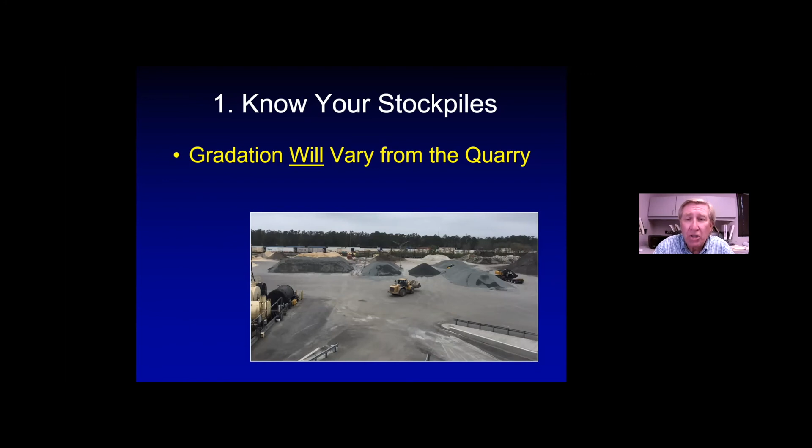If there's any upset conditions at the quarry or at the transfer station - we bring a lot of the aggregates in Florida by rail because we're basically out of stone in the state - so you've got a transfer point at a rail terminal, you've got a transfer point with trucks bringing it into your yard. And the point here is that things can happen, and the caveat here is that gradations will vary. Okay, so they are going to change. The question is, how much do they really do that?

So checking your gradations as they come into your yard is an excellent best practice. Most people will check this anywhere from 1 to 5,000 tons. I'm a big proponent for checking every 1,000 tons of material that comes into the yard and knowing what those gradations are. If you look at this little blackboard here, this is actually a diagram of the stockpiles in the yard, and you'll notice some key numbers on these screens and little diagrams of the date the material came in and what the percent passing was.

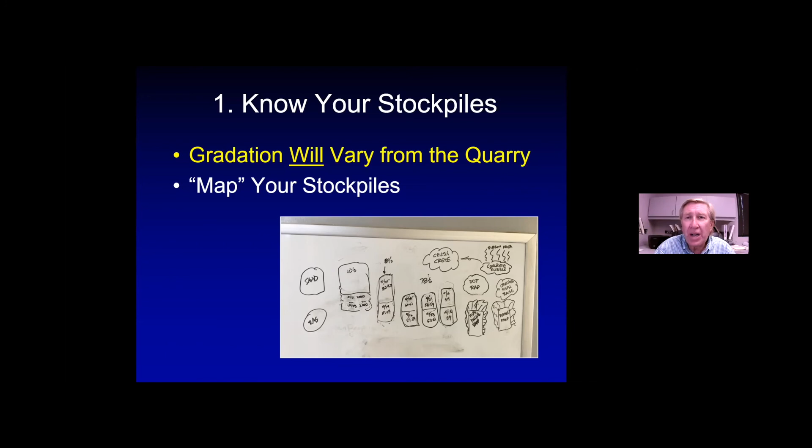This plant uses percent passing in the control sieve for those individual stockpiles. The point is that producers that have success know what's in those stockpiles before they put them into the plant. And because we're testing on that, your first in, first out inventory method is better than your last in, first out approach.

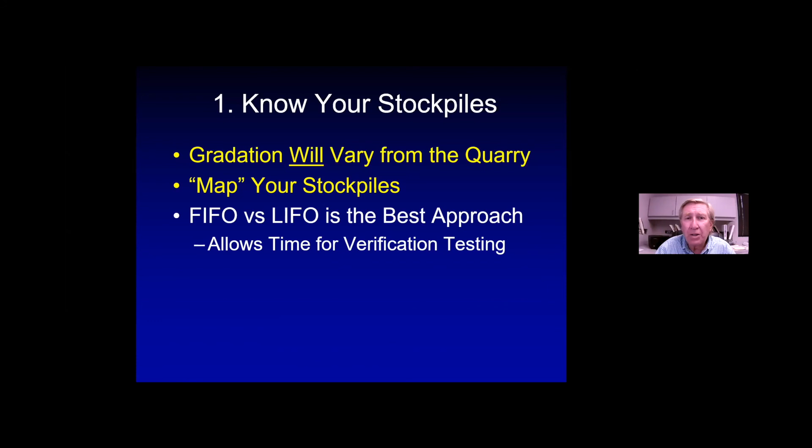Last in, first out is really easy: throw the rock in the front of the pile and feed it into the plant. First in, first out allows you to check your new material and still use your older material in your plant process, so you're always staying on top of that.

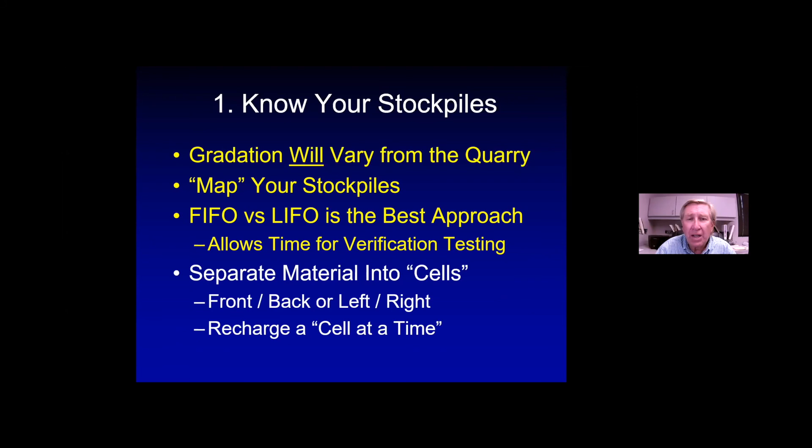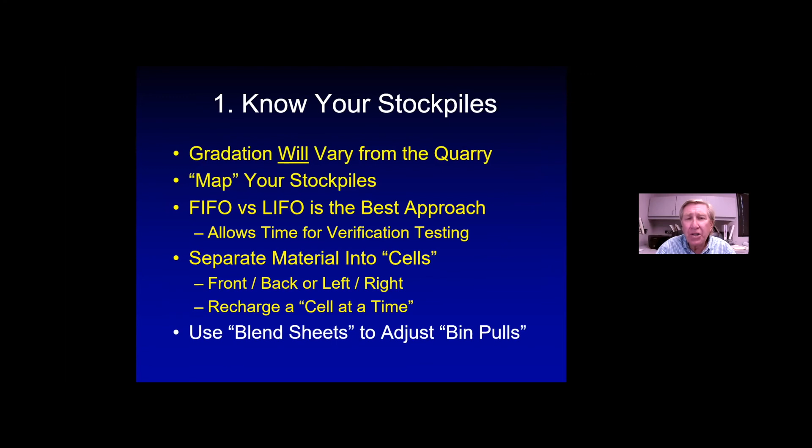And if there is a change, you can use blend sheets to adjust your bin pulls at the plant. The question becomes: are you going to do that proactively, or reactively? You can do this proactively if you see a large adjustment.

You use these blend sheets to create your job mix formula, your bin pulls, or your percentages to run your plant based on average gradations. So you'll come to a day when you look at this and say, wow, the material's really fined up, it's really coarsed up, we're out of the other material. Maybe we'll make a proactive change.

The difference between producers that are totally on top of their game, always ringing the bell with a bonus or never having any problems, is that they've embraced this proactive concept, and you'll see that throughout this presentation. Again, these aren't necessarily our ideas; this is what we see working with companies that have great success.

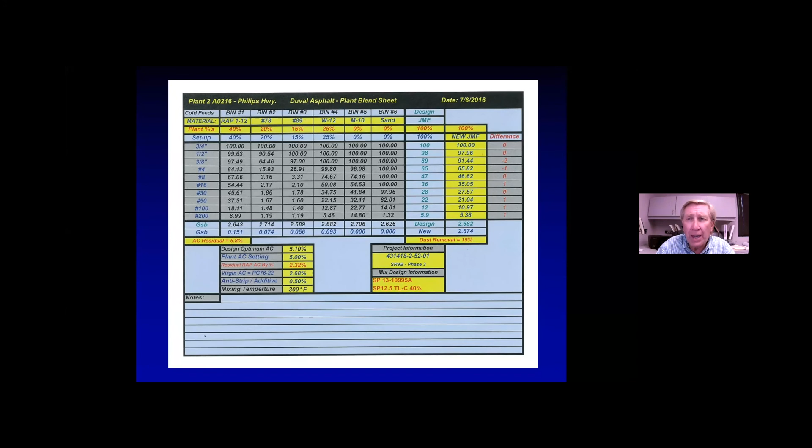They know what's in the pile. They're making a decision proactively on whether they're going to make a change or not. They're not going to wait for the mix to go bad. For that reason, they also go and check their plant calibrations, because calibrations do shift, and the plants are not going to be perfect.

It's about routinely checking plant calibrations, which is not the same as changing them. Checking is not changing - that's a key point. It lets you know your calibration has not shifted. Usually this is a mechanical or electrical problem that caused this to be the case. One common problem is a plugged feeder - the guys open the gate to remove the obstruction, and they'll accidentally put the gate not back in exactly the same position.

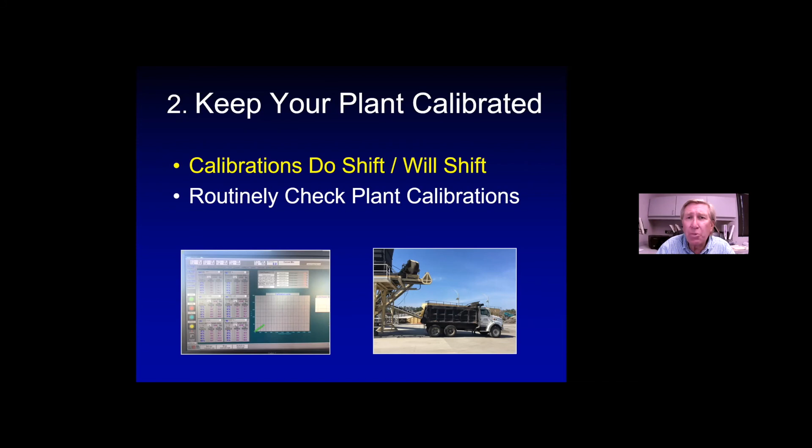This happens a lot, and it changes your calibration and will affect the final mix. So checking your calibrations proactively is what people do that have great success, rather than waiting until the mix just goes bad.

Electrical and mechanical problems are usually at fault here, not necessarily a human problem. It only takes 30 or 45 minutes per test. A lot of guys will check those calibrations at the end of the day when they're on hold - they'll check a feeder, check a belt scale, or check an asphalt meter.

It's important, if you find a shift, that you don't make a change without contacting the quality control department, because they may have adjusted the bin pulls to make up for a calibration error they didn't know existed in the plant. So when you find a calibration shift, you want to work with QC and say, look, this is what I've found.

It's going to be a little coarser, a little finer than we anticipate. What do you want us to do here? And then everybody's working as a team.

Teamwork is something that is going to be woven through my presentation and Steve's presentation. This should be another bullet point, because people that have great success have developed a good teamwork protocol inside their organization.

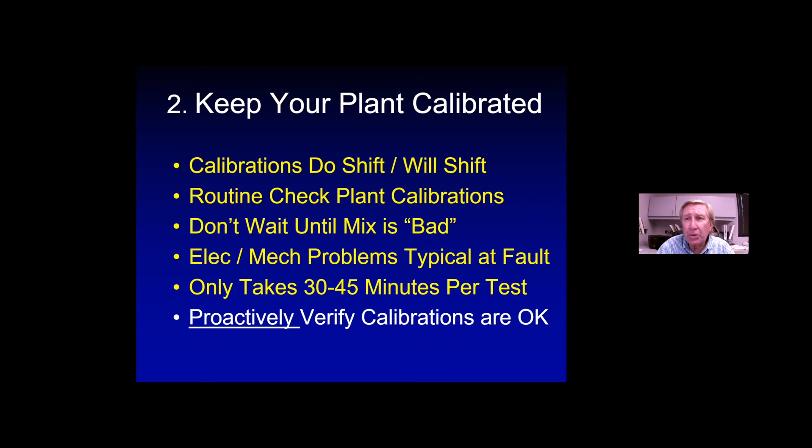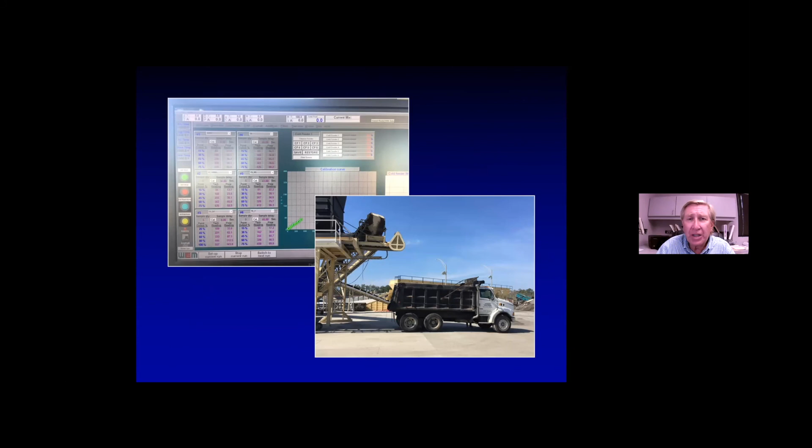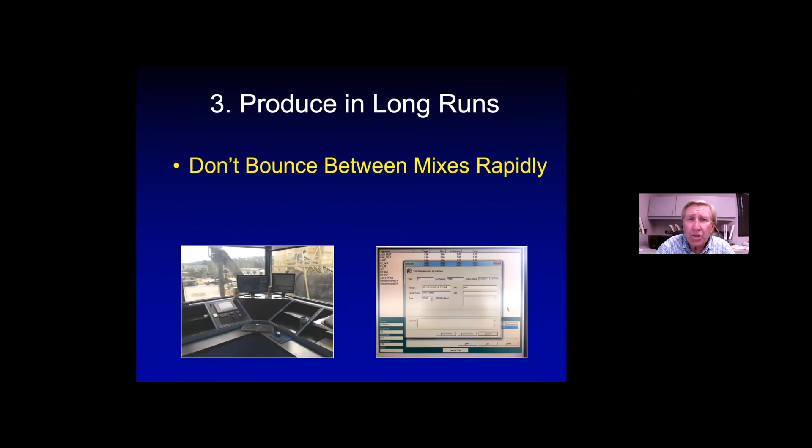Producing long runs. These don't bounce between mixes rapidly. These drum mixer type plants take time to level out. This is affected by the PID loops in the system.

Since it takes a little bit of time to level out, and because these plants are really not designed to make short runs of many different materials, they're really designed to make long runs of one material. You want to really consider staggering your start times on different mixes with your paving crew so that you can produce a good quantity of material and give the plant time to level out.

Try producing a silo at a time. What I like to embrace is this idea that your absolute minimum per run would be 100 tons. So 100 tons of one mix, make a mix change, make 100 tons of another mix, make a mix change.

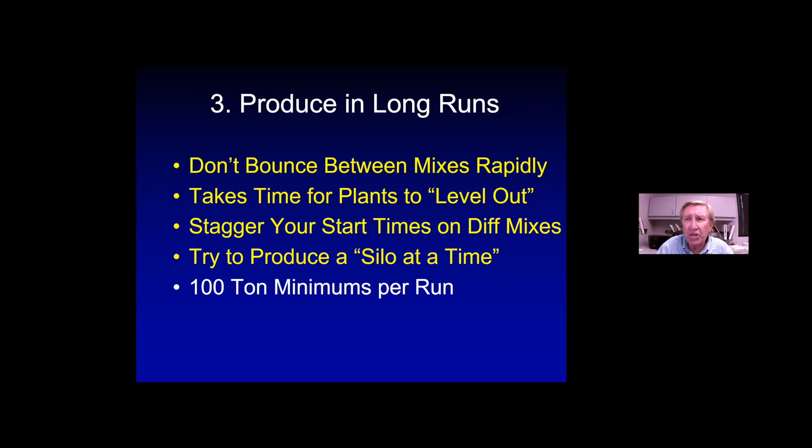If you stagger your start times, this allows you to come in early, produce an entire silo of mix, start shipping that mix while you're shifting to a new mix, filling another silo. The next crew comes in, say a half hour later, an hour later, starts paving on that job. And now you're draining that mix. And after that silo is full, you can switch back to your first silo and recharge that silo. And you can make a good quantity of material at a time.

A lot of people are not familiar with this idea of a PID loop in the automation. Basically what that is: if it needs to make a change, how fast does it make that change? Does it increment? How much time does it take to close that loop?

Most plant automation actually starts up on theoretical values before the sensors start kicking in, so there's another time delay there. This is why you'll discover that some plants take a little more time to level out than others, because the PID loops are not set real tightly.

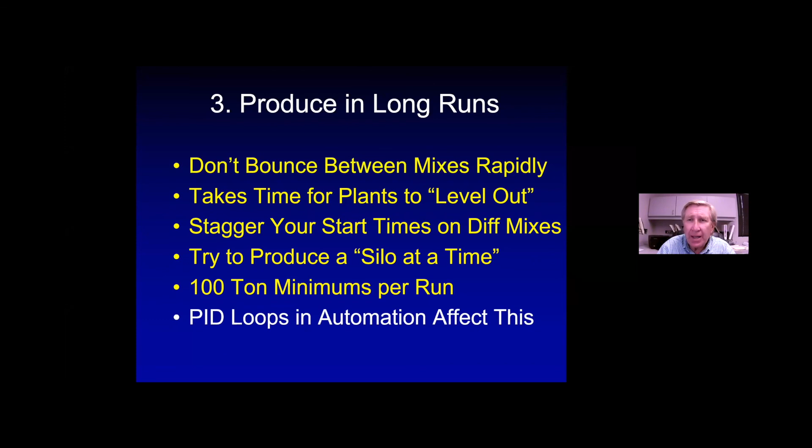Usually the manufacturer is the only one that has access to this information. You can work with your control vendor and improve that, but this is a fact of the business. And once you understand that exists, then this whole idea of producing in long runs makes a lot of sense.

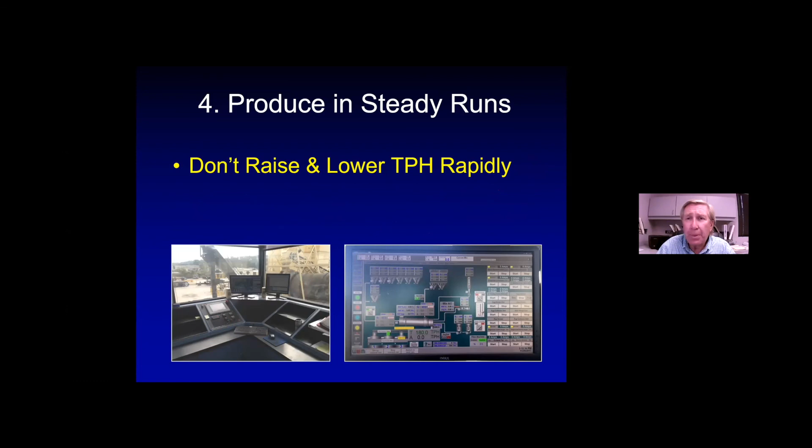Also, producing steady runs. You don't want to jack your production rate up and down rapidly. Again, it takes time for the controls to adjust for that ton per hour change, and the PID loop is going to affect that. That makes some sense, right, to someone who's plugged into this new reality.

The other thing that's very critical is it takes time for the baghouse fines to catch up. It can take anywhere from 20 to 40 minutes, really at the extreme, for the baghouse fines to be collected, go on the bags, sit on the bags, get cleaned off the bags, be dropped in the hopper, be discharged in the hopper, go down the hopper, go up to the incline conveyor, and go back into the plant.

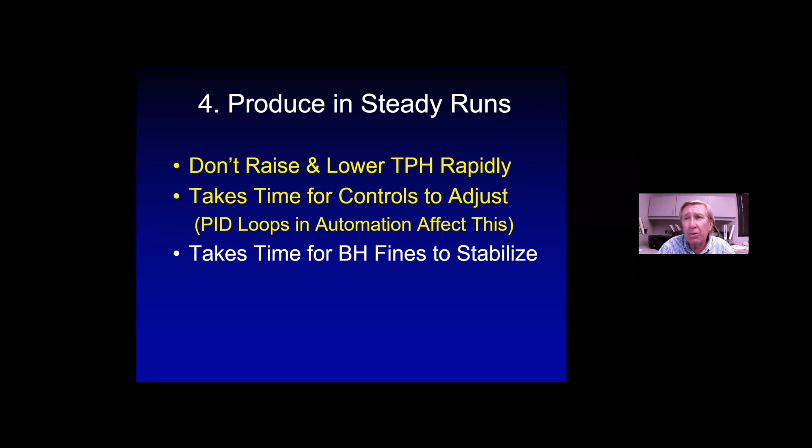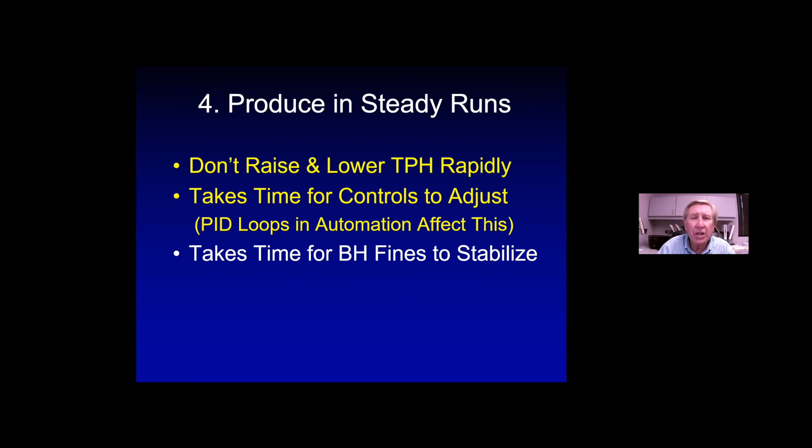So if you change your production rate rapidly up and down, there's a chance that your baghouse fines are always going to be a little bit out of sync. This is why most of the people that are training people on how to run plants is to make incremental changes in production rate, like 20 ton an hour every 5 minutes or something like that, because that allows your fines, which are very important to managing voids in the final mix, to be in the proper range.

Steady running produces steady mixes. So there's your soundbite for the day: steady running produces steady mixes. That's what most people that have great success are doing.

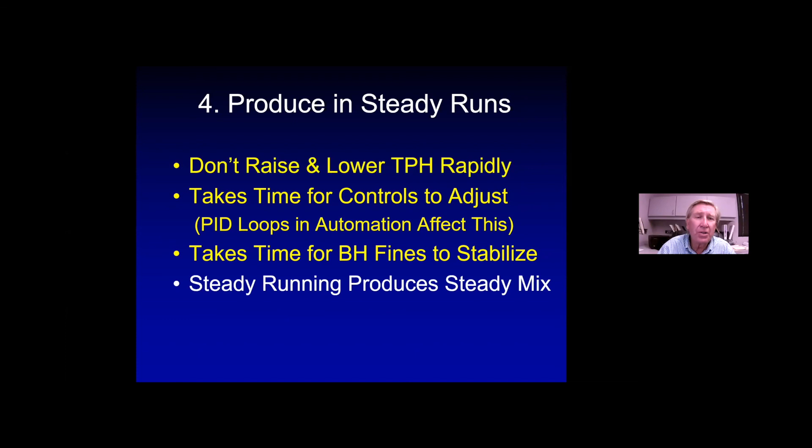Also control the mix temperature within 10 degrees. Now you're going to say 10 degrees. You lay a $100 bill.

You lay a $100 bill on the control counter and tell that operator to control that temperature within 10 degrees. Get on the radio and tell that loader guy to always feed from the same place at the pile. Don't change the depth he feeds from, because wet material is going to be on the very bottom of the pile. And if they can do that all day, they can take that $100 bill home.

I guarantee you'll lose $100 every single day. So our master temperature range could be 20 to 30 degrees. But you'll find when you talk to paving experts and compaction experts that if you move that paving temperature more than 15 degrees, it's going to change your optimum rolling pattern. And because voids and field density are so critical to the success of our mixes, we must do a good effort at controlling the temperature within 10 or 15 degrees back at the plant.

Be knowledgeable of the fact that the temperature coming out of the mixer is not necessarily going to be the same temperature that's in the truck, particularly when you get to big rock mixes, because it takes time for the inner mass of those large stone particles to stabilize in temperature. And while they're doing that, they're robbing temperature from the surface.

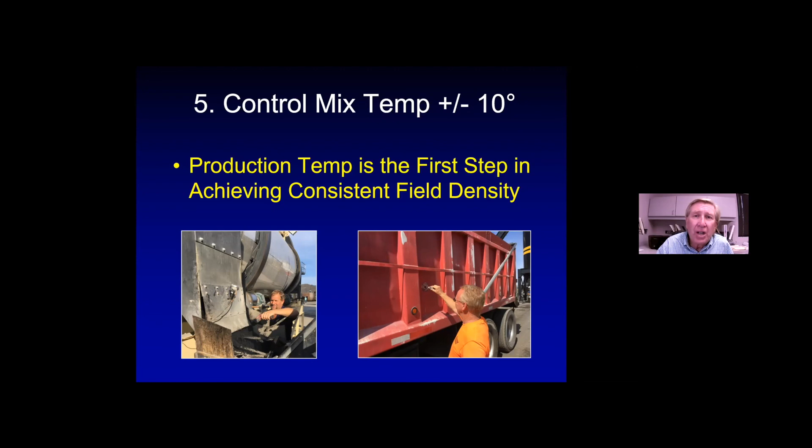So you learn to manage that, and you try to make sure that you're controlling that temperature within 10 or 15 degrees. I always shoot for 10, okay? Because again, this affects the rolling pattern, which is what Steve's going to be talking about next. And so simply holding mix temperature consistent, which is doable, helps achieve consistent density in the field. Producers with great success on the paving side and the production side do this.

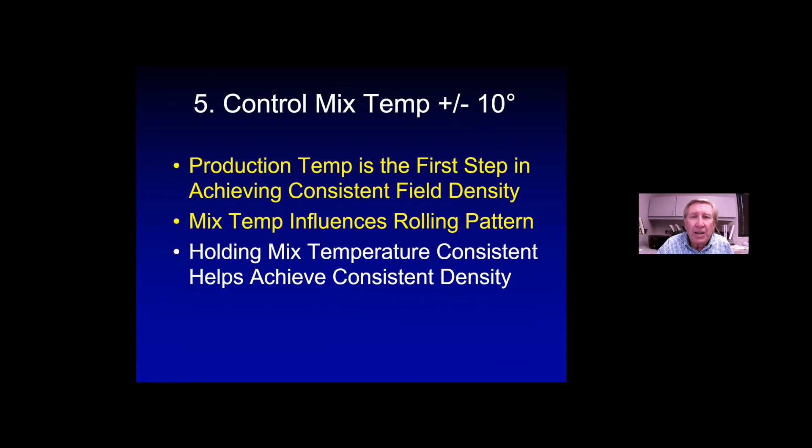Next thing is to socket load your trucks. You want to load in multiple drops. I call it socket loading the truck, basically by loading in 3 drops: front, back, and middle, which is a standard practice in this industry for a square body truck. This minimizes the chance for segregation in the truck vessel, and minimizes and controls the rollout, because you're loading against the bulkhead in the front, against the bulkhead in the back, and then you can socket load that last drop right into the middle of the truck.

Now, if you're running a live bottom truck or a bottom dump truck, then you want to test your mixes. Here's a concept for you. For a lot of people, this is kind of an arguable point. A lot of people say, well, we load all in one drop, we creep and go, we have a live body truck, we haven't got a problem. My suggestion to you is to think about proving it to yourself, okay?

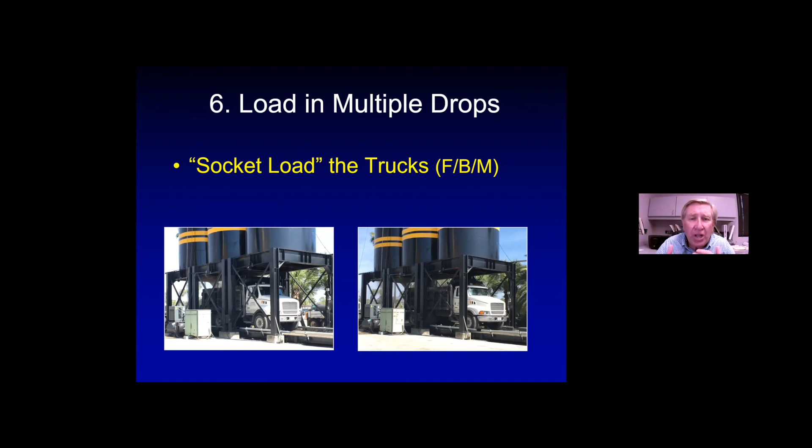Socket load your trucks, front, back, and middle. Check every other load for gradation consistency, and then use your procedure and check every other load, and scientifically look at the data and see if you get some variability here. I've found in my experience consulting around the plant that the test consistency and the mix trends can frequently be improved with properly loading trucks.

And it's always a point of argument, but I've demonstrated it time and time again, even for mixes as small as half-inch mixes, particularly when you get into 3/4, 19 millimeter mixes, or 1-inch, 25 millimeter mixes. If you do a lot of testing, you'll find that your gradation consistency will improve by properly loading trucks. So it's a point of contention, a point of debate, but producers that have mix success employ this habit. And so now you're arguing with your competitors who are having great success. The point is that if you have any disbelief on this, it can be tested working with your QC department.

Also, it's very important that you don't load a chatter loaded truck. What that means is at the very end of the drop, most control systems will say, oh, I got to put another 500, 600, 700 pounds on that truck. They put 100 pounds on, close the gate, 100 tons on, close the gate, 100 tons on, close the gate, get close to target, and then shoot the buzzer off, send the truck to the job site.

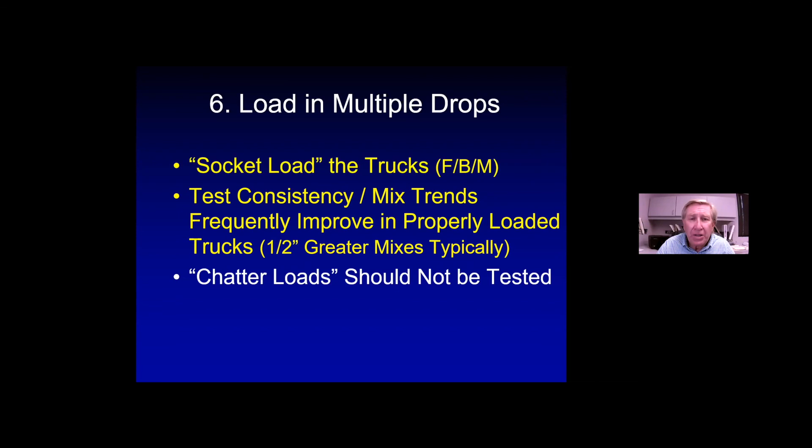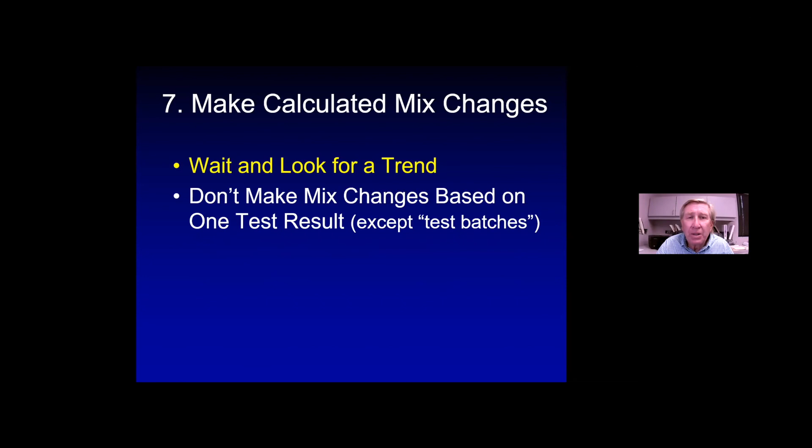So these are procedures for loading trucks. Last thing is make calculated mix changes. Wait and look for a trend. Don't make rapid changes based on one test result, because things can happen and life is not perfect. Wait and get 2 or 3 samples, look for the trend, and if it trends in one direction, go ahead and make a mix change.

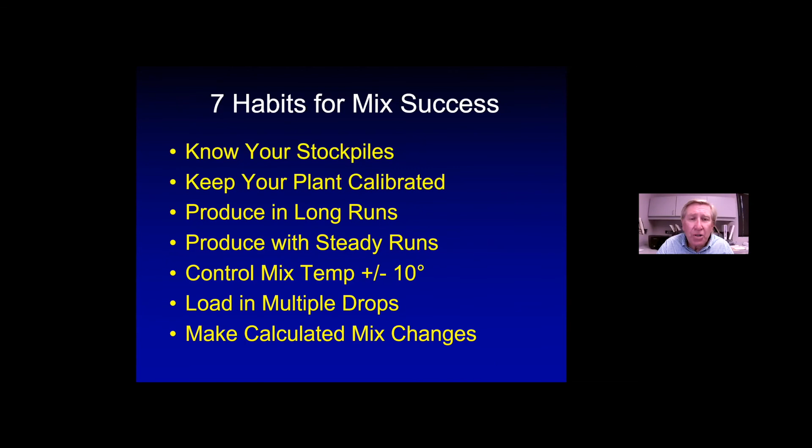So those are the 7 habits of producers that really have great mix success. They know what's in their piles. They keep their plant calibrated. They check their calibrations proactively. They produce in long runs. They produce in steady runs. They control their temperature within 10 degrees. They load trucks properly, and they make calculated mix changes.

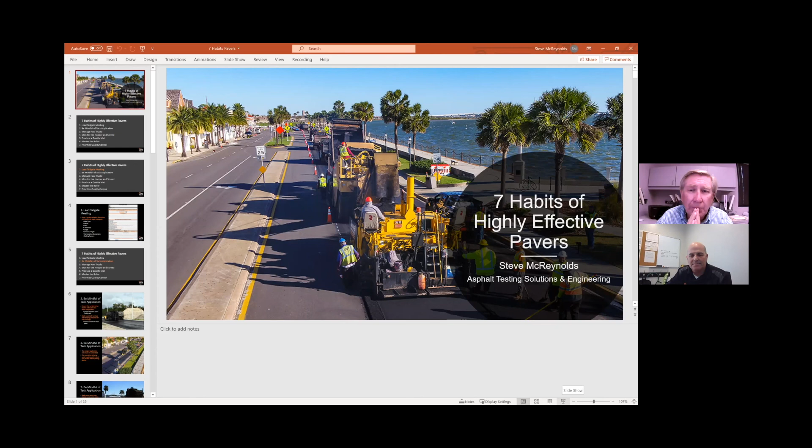So the 7 habits of highly effective pavers. Certainly this is not everything that occurs on a paving train day in and day out, but we found that if you follow these 7 habits, you'll greatly improve your chances of a successful paving operation. So we keep doing these day in, day out, and they become habits, and your success is going to get better.

So these 7 habits are: lead a tailgate meeting, be mindful of tack application, manage haul trucks, monitor the hopper and screed, produce a quality mat, master the roller, and prioritize quality control.

So this lead tailgate meeting should be held by the lead QC and the paving foreman, and there are some key items on this tailgate meeting. So we have the whole paving crew around, and maybe the superintendent, and we're going to discuss what we're doing. Some of the things we're going to discuss are the mix type we're placing, the lanes we're going to be paving, and what number lift we're on. Are we on the first lift, second lift, third lift? Are we doing multiple lifts?

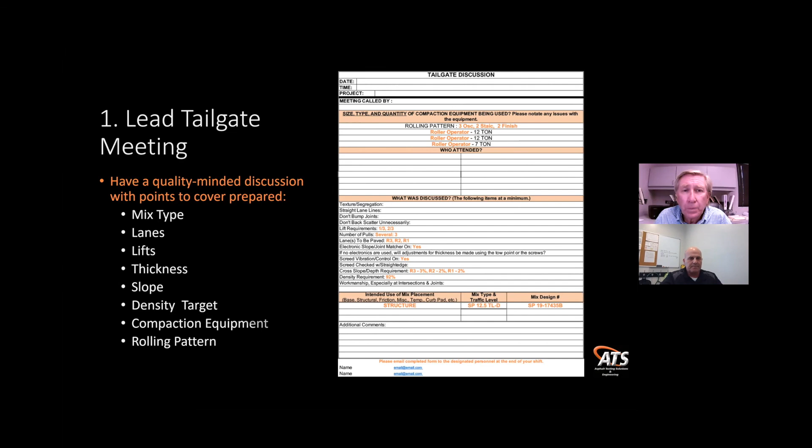Secondly, we need to be mindful of our tack application. We want to ensure the surface to be tacked is dry and has been swept clean. Tractor brooms, vacuum trucks, and power blowers all work really well, but we want to make sure that surface to be tacked is clean. We don't want to spread that tack over any kind of heavy dirt or dust, something that might cause a bonding issue.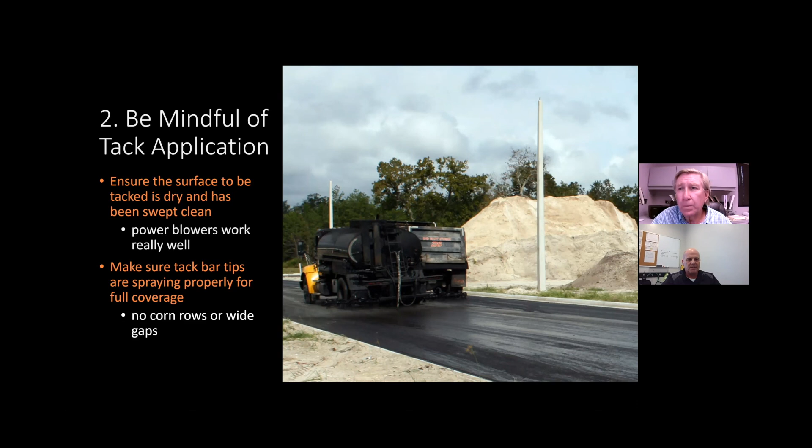Also on the truck, we just want to make sure these tack bar tips are spraying properly for full coverage. We don't want any cornrows or wide gaps. We want a nice coverage of the entire surface to be paved on. We want to make sure the proper application rate is used, and this is usually a QC function. He gets with the tack distributor operator to make sure they're putting the right application for the right surface that we're tacking on.

Also, if you're using an emulsion, you want to make sure that the tack is broken before the pavement begins. It's always a good idea to make sure that tack breaks. That way we know we're going to get a good bond.

Make sure not to over tack in hand wand areas. So if we're spraying that beginning joint or some side joints that need a hand wand attention, we want to make sure we don't over tack. So we don't have a big delay in waiting for that tack to break, or we get so much down that it pumps up through the mat.

And remember, proper tack application can help with density. So if we get this right, it's really going to help with our density.

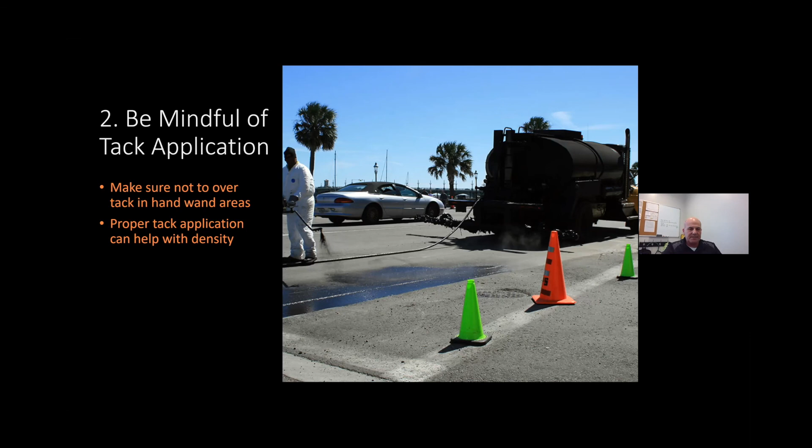We want to manage our haul trucks. We want to balance the trucks with production. Now there's software out there that's available, for example, like the CAT production calculator app. But this is very important. We want to, just like TJ talked about the plant, a steady production run, we want to be steady with our paving. We want to continue the best we can going down the road without interruption and without stopping. Now we know that's not always feasible. Wish it were, but if we get enough trucks balanced with the plant production, the distance of the haul, and to ensure the minimal stops that we can throughout the day, it's going to greatly improve our chances of a nice, smooth, densified paving mat.

We don't want to bump the paver or the MTV if you're using one, but if we back that haul truck into the paver, chances are we're going to create a knot in that mat that we're either going to have to roll out or we're going to have to replace if it's a final surface course because of a straight edge deficiency or a laser profilograph deficiency. So we want to make sure that the paver or the MTV picks up the truck and the truck does not back into the paver.

And we also want to make sure that we charge the hopper swiftly. When that paver picks up the truck, they want to raise that bed with the tailgate locked, get it nice and elevated, and then unlock the tailgate and swiftly charge the hopper. We want the mix to come out in a single mass the best that we can. We don't want to dribble any of the mix out. You're going to possibly segregate the mix if we do that.

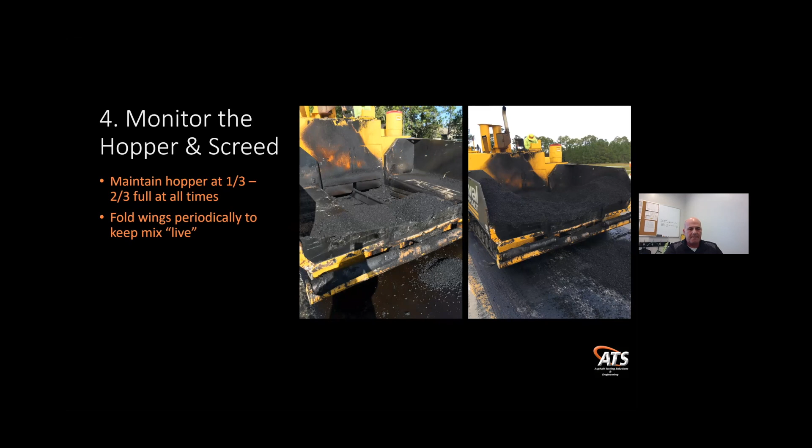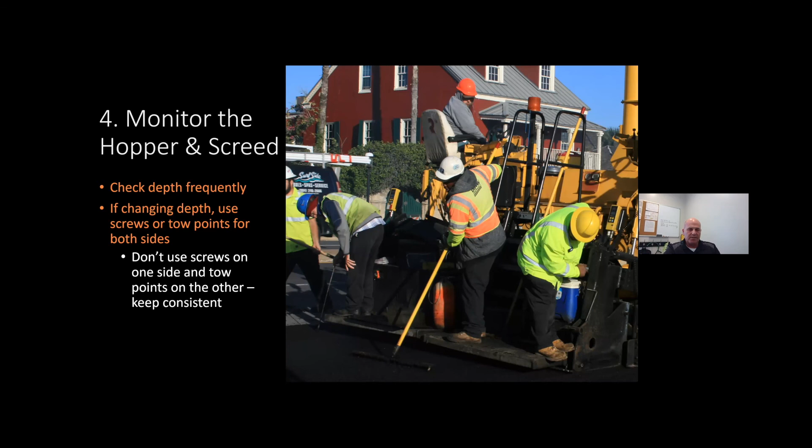We want to check the depth frequently. If we're changing depth, we want to use the screws on the back of the screed or the tow points for both sides. So you don't want to use the screws on one side and the tow points on the other. They may not be equal in raising or lowering the screed to where it needs to be. And it also can cause a warp in the screed. And we know that if we get a warped screed, we're not going to pave a smooth, aesthetically looking mat. We're going to have issues. So we want to use either the tow points or the screws, not one and the other.

Monitor for marks and drags. We always want to be looking behind that screed and make sure that we don't have any marks the screed's making or any drag, something caught in the mix, come out of a haul truck or something like that, and is dragging that mat, going to cause us a big problem. The sooner we catch that and stop and repair it, the better off we are.

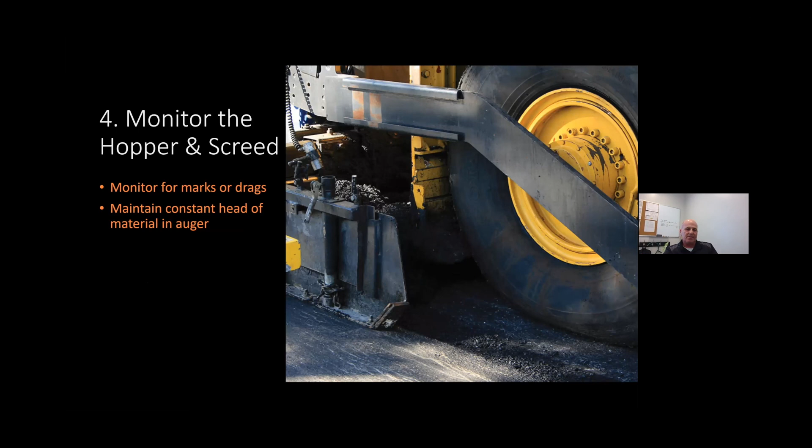We also want to maintain a constant head of material in the auger. This is important for thickness, for smoothness, and also to eliminate that segregation potential.

We want to produce a quality mat. We want to avoid excess luting or raking. Now, naturally, this is a handwork area and you're going to have some luting and raking, but we really need to pay attention to cut that down the best that we can. Plan our paving mat the best we can to avoid these.

We don't want to backscatter material. So if we have something in the mat that needs to come out, we just take our lute, the end of it, pull it out, and then take a shovel full of hot mix, go put it in the hole that you extracted the problem from, and then lute it over.

And as we lute, it has a tendency for the larger stone to come to the top of the mat. We want to make sure that after we lute and get it to the right elevation, we want to get those larger aggregates out of there. We want to rake them off the mat and cast them to the side, do away with them. We don't want to roll it in the mat. Could cause issues down the road with raveling, and it just doesn't look good as well. So we don't want to roll those large rocks in there. We want to get rid of them.

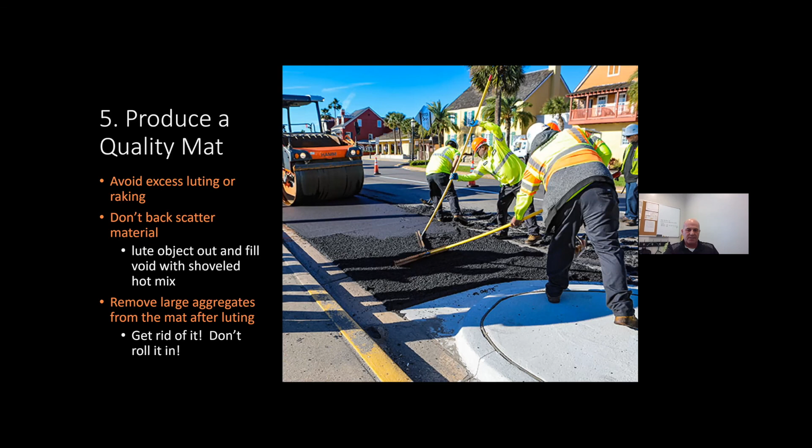We want to master the roller. Ensure your pattern is keeping pace with the paver. If it's not, insist the paver speed be slowed down. So we do not want that paver getting way away from our rollers. We're back here trying to achieve density and get a nice smooth mat.

And we need to be compacting that mat at a good temperature. If our paver gets too far ahead, we could lose temperature in that mat. We might not achieve our density. So really the rollers need to take precedence here. Density needs to take precedence, and let's slow that paver down if it gets too far ahead.

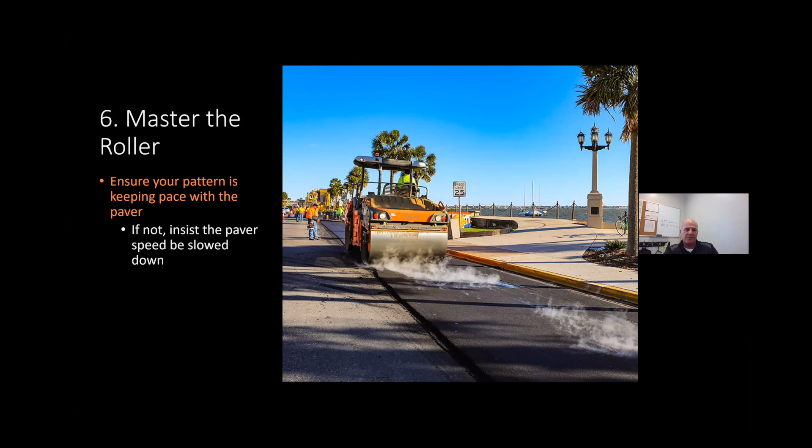We need to monitor the mat for pickup. If the roller picks up something, nothing worse than we get a pickup on that roller, nobody notices it, and we go 1,500 or 2,000 feet down the mat with the roller picking up material and making holes in the mat. It's going to make for some pretty ugly repair, and it could cause issues down the road.

We also want to use a proper technique with our rollers as we stop to change directions to prevent roller heads. We want to come in at that nice angle instead of straight forward and backward, and then reverse our direction to avoid those roller heads.

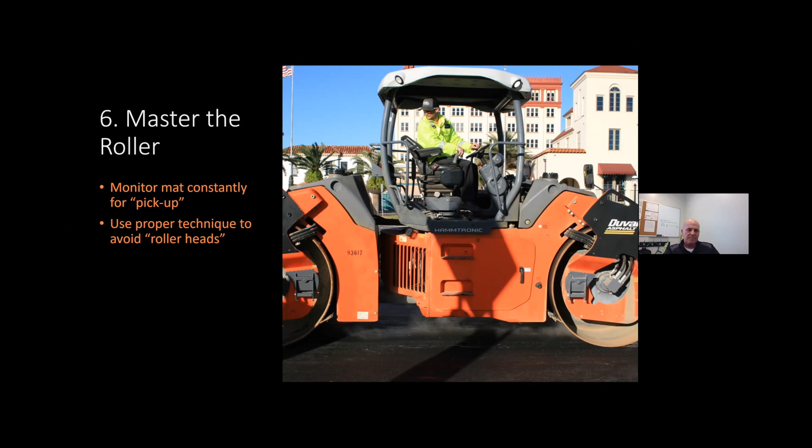We want to prioritize our quality control. We want to monitor our edge lines for straightness. That's a pride thing for me. I think we can pave in straight lines, and we just need to pave in straight lines. It looks a lot better. It means we're paying attention to what we're doing.

We want to monitor the temperatures of incoming trucks and the mat. You remember TJ had said that the temperature directly goes with density. Now out on the road, we can't control the temperature like they can back at the plant. So we have to monitor that temperature, so we know if we get a drop in temperature, we can notify the plant and possibly change our rolling pattern. Or if we get a spike in temperature, same thing. We need to call back to the plant, say, hey, the last 3 or 4 trucks have been really hot or really cool, and we need to get this temperature corrected, so we can get good density out there.

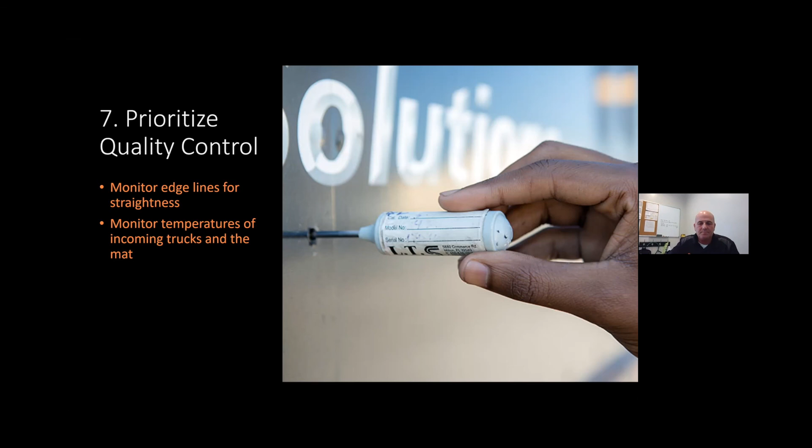Want to monitor our spread rate frequently. I know in Florida here, we have a specification that we do the first 5 loads or 100 tons and then try to do it every 200 tons after that. I think a good idea is monitor that spread rate every 100 tons to make sure we're getting the right depth mat placed. Also, for quality control, we want to constantly look at that mat, look for defects such as pulls or tears or any segregation, so we can quickly get those corrected.

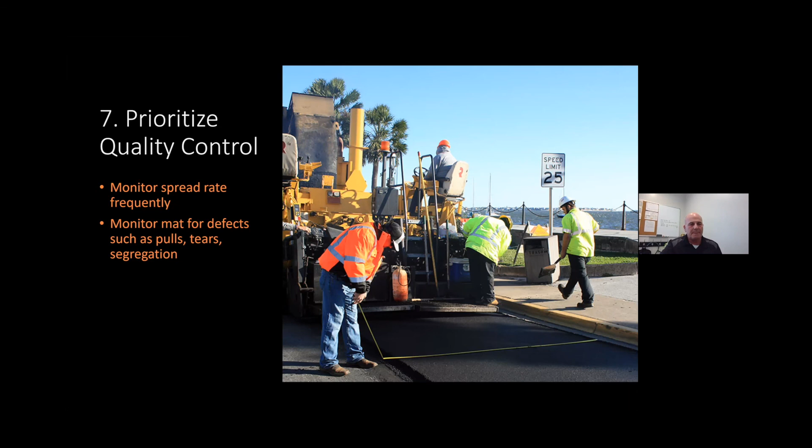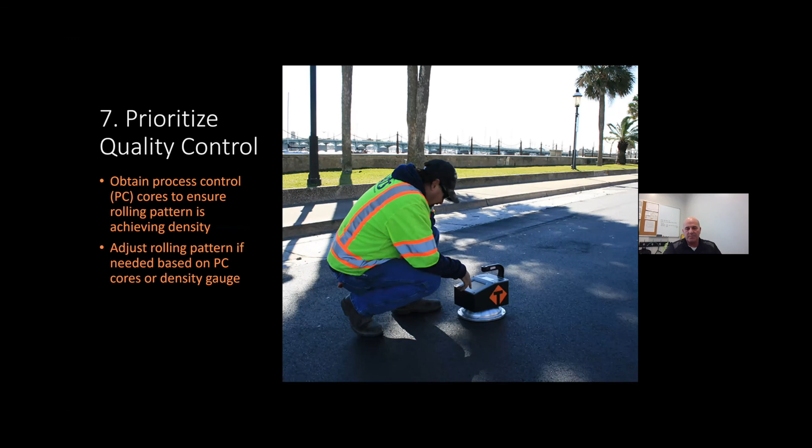We want to obtain process control cores and ensure our rolling pattern is achieving density. We want to adjust this rolling pattern if needed based on these PC cores or our density gauges. It's really important. Remember, density is everything. So we really want to monitor that.

Also, we want to check all our joints and the mat for smoothness with a manual or rolling straight edge. Usually if we're getting good density, we know we're going to have a good smooth mat, but we need to check those, especially at those joints.

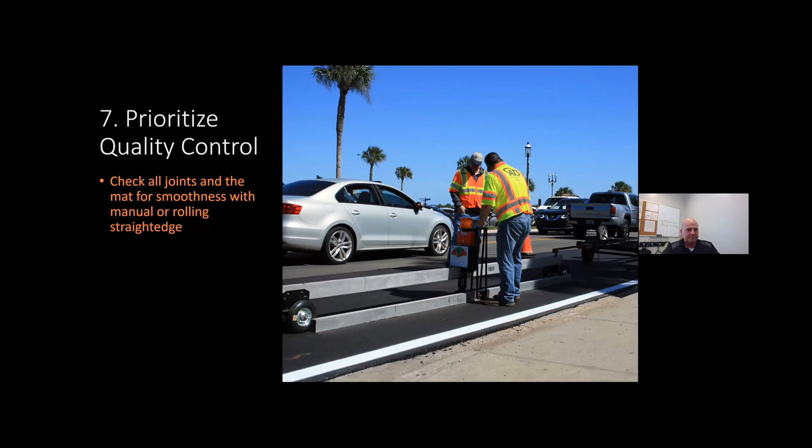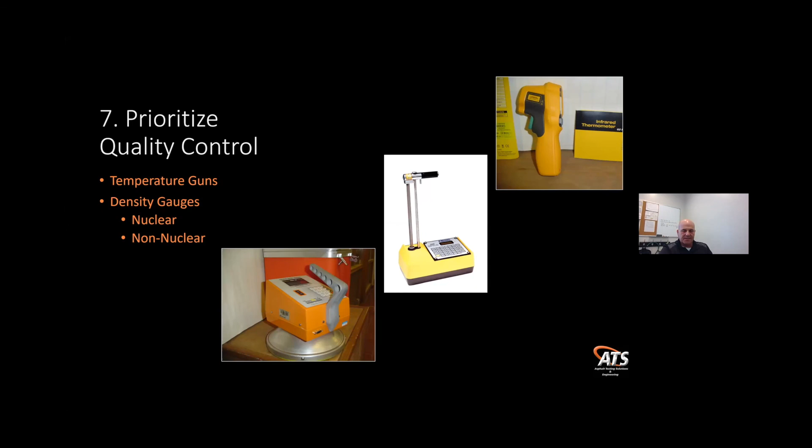Some of our tools for doing those are temperature guns. That's the infrared temperature gun, up in the right, to monitor our mat temperature. And then also our density gauges, either nuclear or non-nuclear, work really well as long as they're calibrated to the mix. They work really well monitoring our density.

So successful paving needs total buy-in from everyone, meaning from upper management all the way through the organization. We need to praise loudly when deserved and provide constructive correction when needed. So thank you.